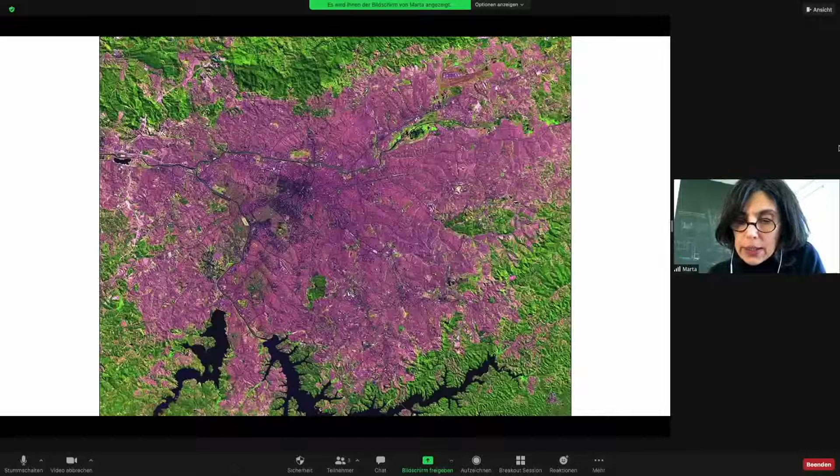São Paulo is a modern city. Although founded almost 500 years ago, the city we face today was basically built in the 20th century. A little more than 100 years later, greater São Paulo has more than 20 million inhabitants. São Paulo, which was a small city in the first 4 centuries of Brazilian history, became the main economical and cultural center of Brazil during the 20th century. As a result of this brutal development and related radical transformation, the city today has almost no buildings from centuries previous to the 20th century.

A second characteristic relevant to this contextualization is that São Paulo lies within a hydrographic basin on a plateau delineated by a network of watercourses flowing through hilly terrain. The metropolis is directly related to the trunk of the waterway system, the catchment basin, which determines a constellation of discontinuous sectors. The railway system, established from the second half of the 19th century in search of available flat and cheap land, chose mostly trajectories parallel to the main rivers, starting the irreversible process of building the wetlands as habitable space.

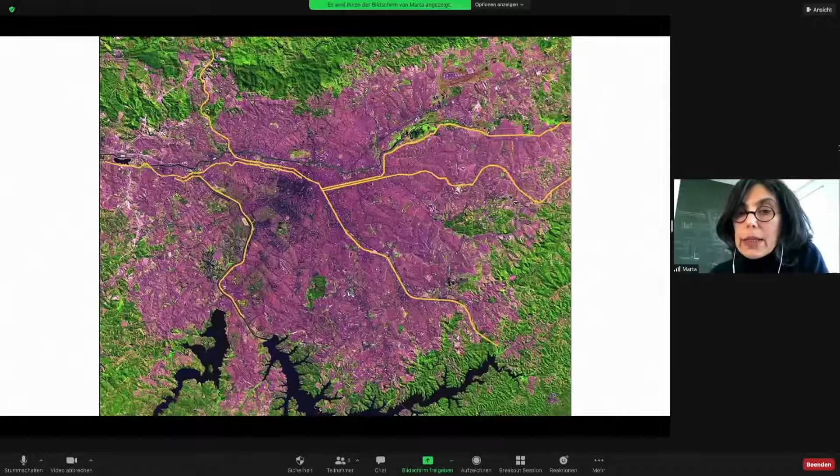And so we finally arrive at the location of the project that I'm going to show. The red ring is the location of Paraisópolis favela, where we developed the Antonico Creek urban project, and the red dot is SESC 24 de Maio, located in the historic center of São Paulo.

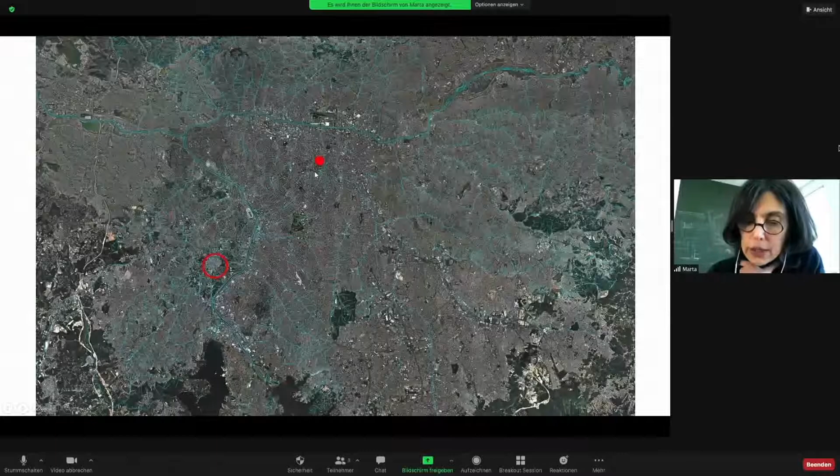The Antonico Creek urban project was part of the favelas urbanization program carried out by the municipality of São Paulo. Paraisópolis is the city's second largest favela, with about 70,000 inhabitants. This is a very well consolidated community that has been living in this place for the last 100 years, including during the pandemic times. In lack of initiatives from the municipality, they organized a very organized system of protection for each other. It's a very consolidated community.

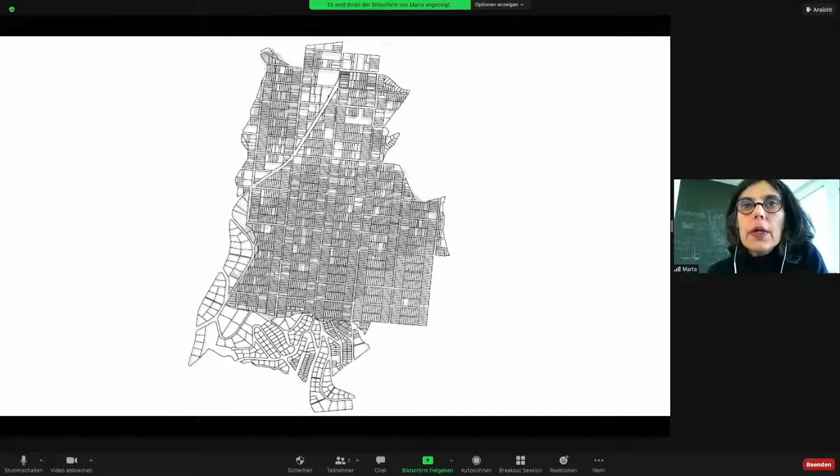This occupation arose as a result of the invasion of a fairly regular subdivision on an irregular topography with some rather steep features, with which the urbanization plan never related. So that was the original subdivision, and that's the occupancy plan on top of it. Cutting diagonally across the orthogonal urban grid, there is a creek that is now largely underground due to constructions that have successively advanced over its natural watercourse — Antonico Creek.

The favelas urbanization program involved a wide-ranging set of urban infrastructure works, social equipment, and new housing. Sanitation and drainage were included in this scope as actions providing needed structuring for better conditions of habitability throughout the favela.

The reurbanization works realized for Antonico Creek would require the removal of irregular dwellings on areas of the creek unsuitable for construction, resulting in the main structure for articulating the public spaces. Consequently, this project could be one of the principal tools for promoting urbanity in the new district that will emerge at the end of the process.

However, the house being an urgent and immediate need, the main question to be faced is the future maintenance of the opened areas, avoiding new irregular occupation.

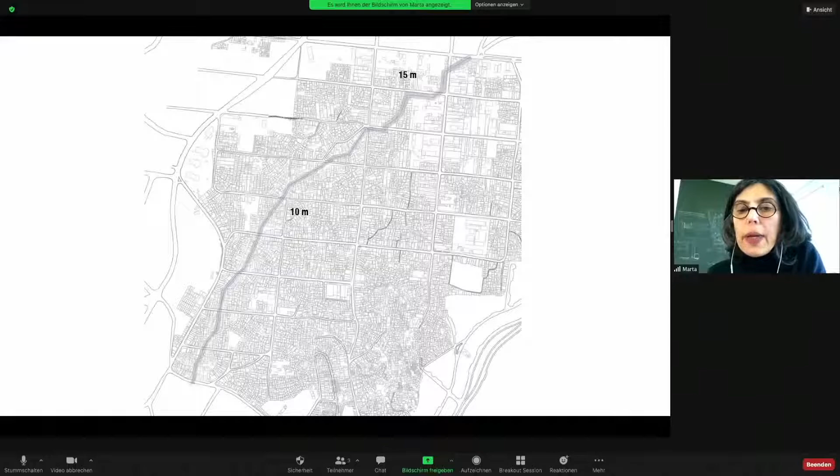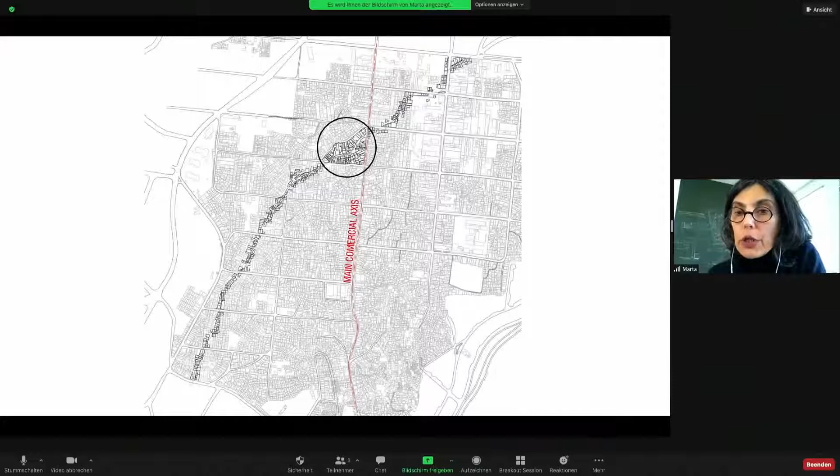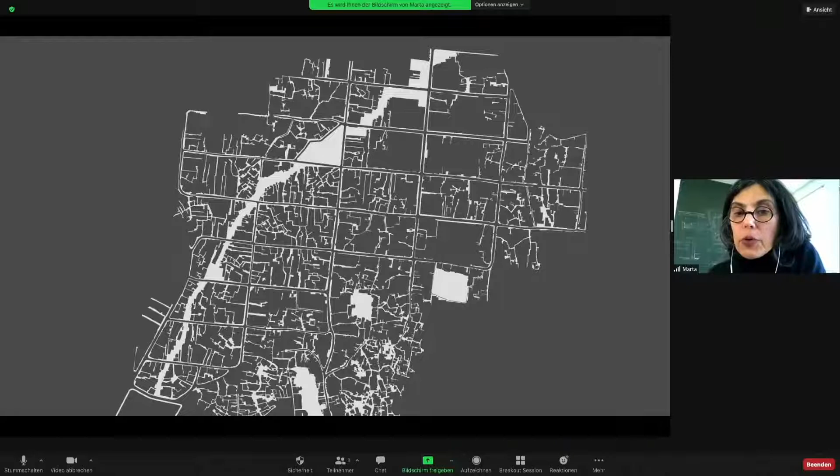First of all, to determine a non-buildable tract, an open area bordering the canal, constituting a stripe with a minimum width of 10 meters. The aim is to ensure access to the channel for the indispensable maintenance service. At the intersection of the main commercial axis, a large area left free may give way to the creation of a square and equipment for collective use. This open stripe will be reprogrammed, giving rise to an ample set of enhanced use values.

Strategy one is creating an unquestionable use value, a good path to mobility. The passage of vehicles other than service vehicles will be restricted. It will be the district's main internal axis of mobility, since it runs along the smoothest topographical terrain to be found in Paraisópolis. Outside the district, it will be extended up to the most recent subway line, connecting the population to the city's mass transit system.

As an alternative means of transportation, a bike path will be constructed, connected to a network of paths foreseen by the city's master plan. The flow of pedestrians and bikers, which should be intense, will be the key factor in the dynamics empowering and protecting the use of the street.

Strategy two: creating a symbolic value, making the river attractive. In the state of São Paulo, the current guidelines for the elaboration of new drainage systems discourage the covering of rivers and creeks. This principle, in the case of a tropical fluvial system, requires the availability of extensive flat marshes for the widening of the watercourse during heavy rainfalls. Such areas are no longer available within densely urbanized areas, where the social costs of removal are very high.

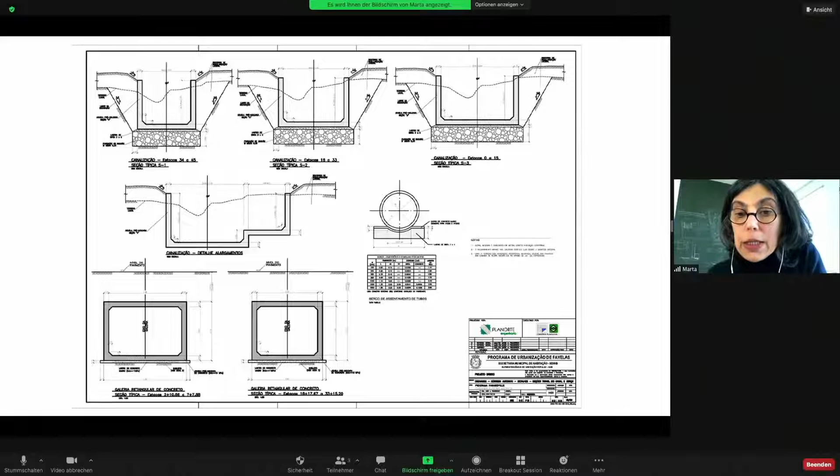When we started this project, this was the original drainage project for Antonico. The solution proposed by the sanitation engineers is based on the deepening of the watercourse channels in order to receive high volumes. This, however, results in a channel that is nearly empty most of the time, with the water at its bottom far below the level of the surrounding area, which is very disastrous because it ends up creating an insurmountable barrier in the city.

The project seeks alternatives for reconciling the favela with the water, no longer considering it as a problem, but rather as something pleasant and positive in the population's day-to-day life. It is based on the premise that it's possible to reconceptualize the model of the drainage system in a way that meets the technical demands of the hydrological system, while also promoting the construction of urbanity in the places it flows through. Our hypothesis points to a possible distinction between the various flows that share the same drainage bed. We can classify these flows into two groups based on the criteria of compatibility with the high-density urban condition which characterizes the areas crossed by the Antonico stream.

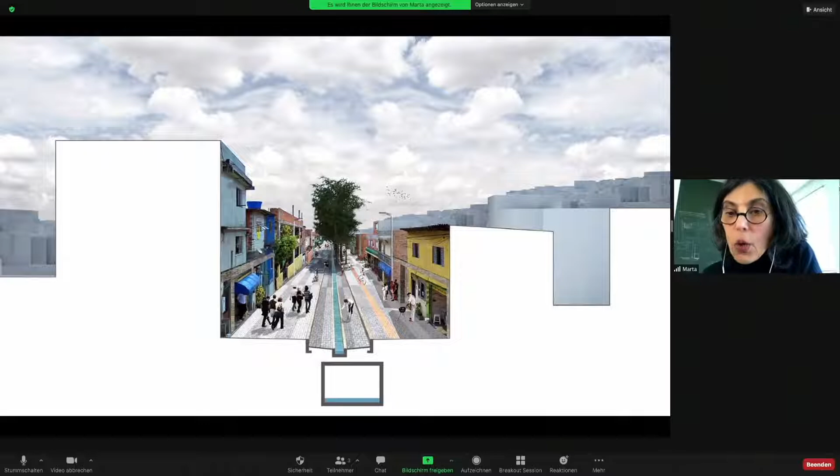We characterize this flow in two types. One is what we call the project flow, understood as a flow where the speed and volume of water are within parameters that allow the proximity of the population with the water, without the risk of drowning or being taken away by the current. That is a flow that will become apparent in the open channels, narrow and shallow, not representing any kind of conflict, and allowing their presence as sutures of the adjacent urban fabric.

The other one is what we call the excess flow, streams whose water volume and speed are not suitable to live with a dense urban situation. It is the flow proposed to stay away from daily life, buried and scaled to meet the limits of the rates of return for 100 years.

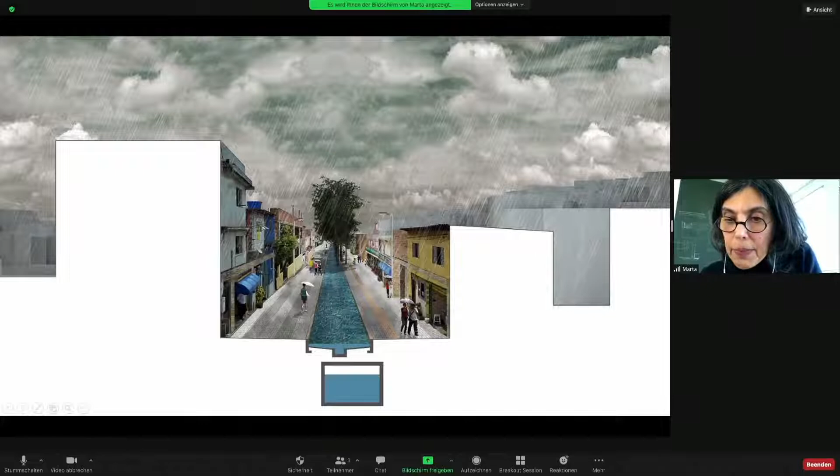The channel project, no longer seen as the production of a mere technical artifact, will create a linear centrality made up of a succession of private and public spaces, open to countless possibilities of resignification by the population.

Strategy 3 is to make the public space readable and active. The stream, in its original condition, represents a big problem to be avoided. The buildings along it turn their back to the water. Being the main passage of people, being an alive and active public space, what was previously undesirable becomes a huge interest.

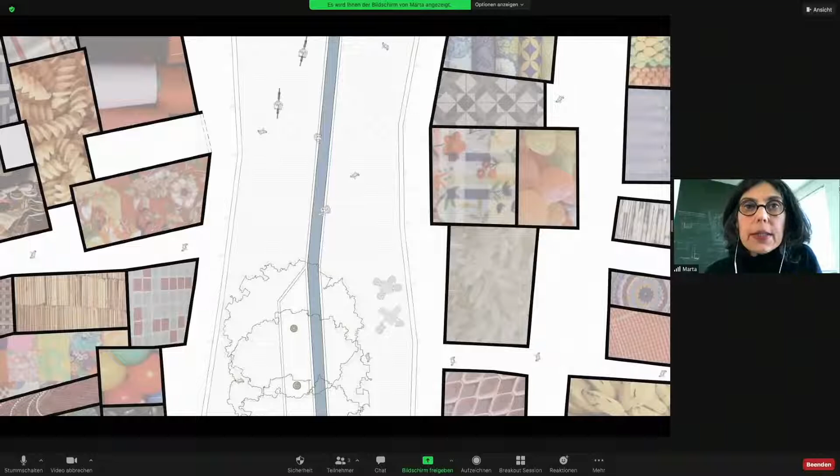Considering that a clear design of the resulting space is fundamental, we imagine the installation of a limit band built of precast concrete elements located in both longitudinal edges of the project area, marking the limit between public areas and private areas, and also serving as support for public installations such as lighting.

Those elements determine an extension band, the area made available for addition in existing buildings within the windowless facades revealed by the demolition and the limit band. It aims to generate a new front for the open public spaces system, ensuring a desirable urban dynamic necessary to manage the place.

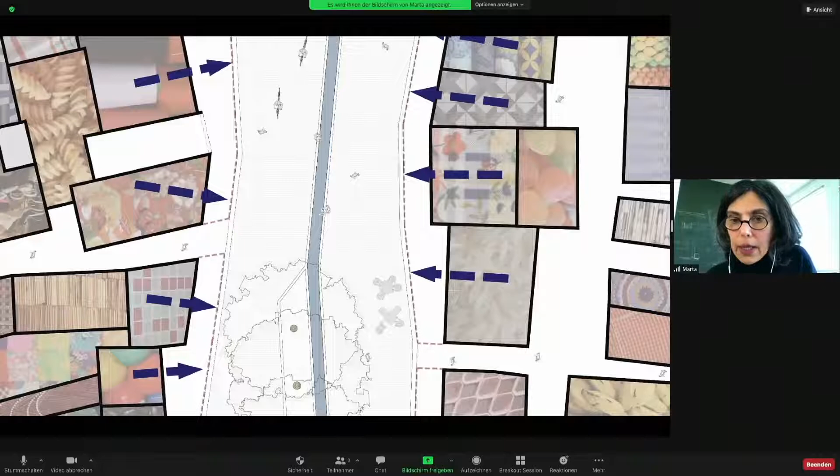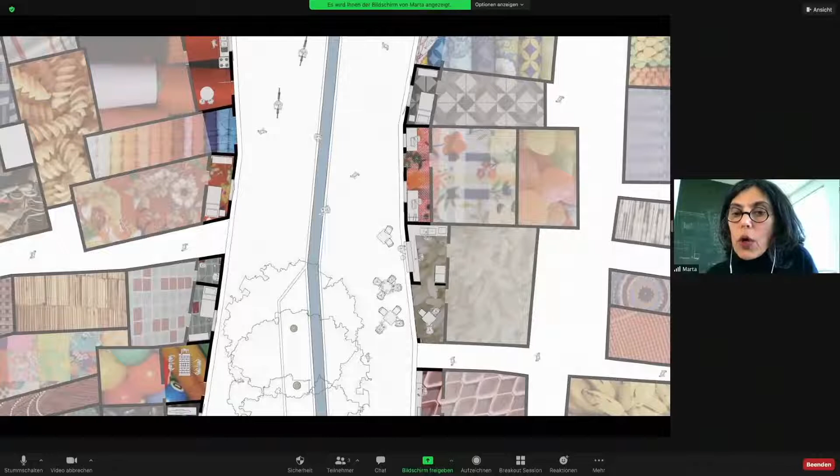Once the houses are enlarged and transformed into commercial and service establishments, a new urban front will arise, boosting the local economy along its course.

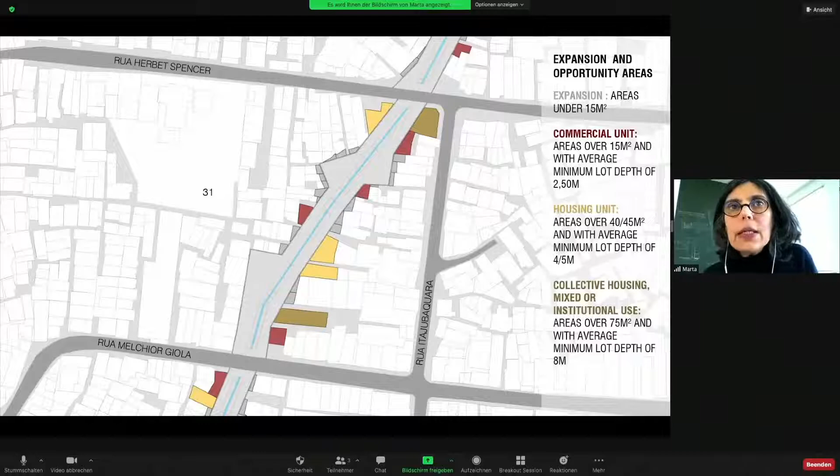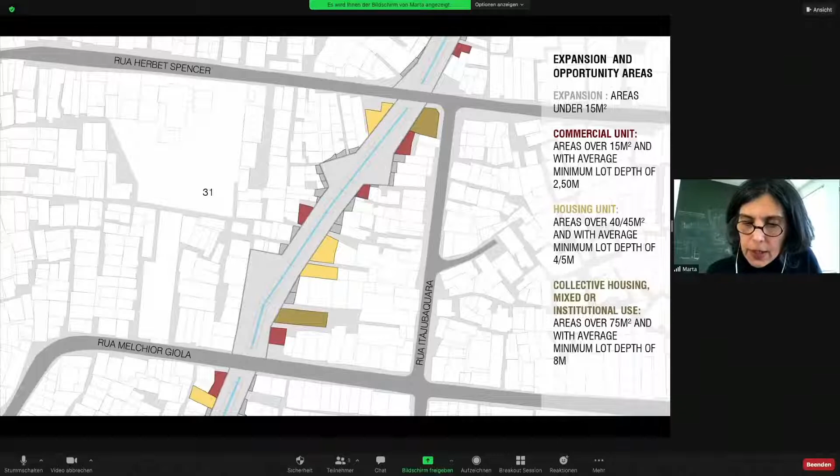So it depends on the size of the resulting place. We can have just an expansion, or a commercial unit, or a housing unit, or even a collective housing mixed or institutional use. So that was the first study I wanted to show you.

And now we are going to speak about SESC 24 de Maio. SESC 24 de Maio is a project by Paulo Mendes da Rocha, with our collaboration. It is located in the historical center of São Paulo, which is immensely dense, diverse, and hosts extremely varied cultural manifestations.

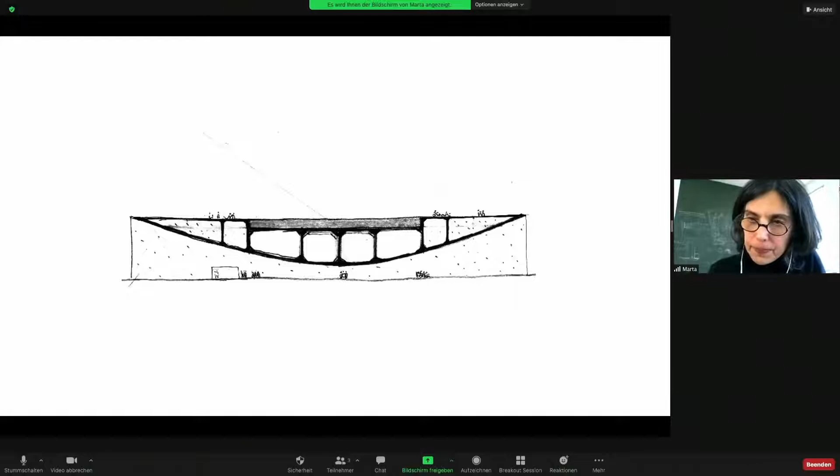To imagine a SESC where the swimming pool is a fundamental part of the program, in the center of São Paulo, meant for us to imagine the biggest possible pool in the sun between the dense mass of constructed buildings. It is amusing to think that the real estate market builds small pools on rooftop apartments marketed as a high luxury few can afford. And this is a popular public swimming pool with a capacity for 400 people simultaneously.

SESC is an institution that oversees 38 activity centers that bring together various fields of expertise, articulated through a variety of cultural, educational, sports, leisure, and health programs. SESC activities are guided by its educational ethics as well as the pursuit of broader social well-being, in which the term culture is understood in its full spectrum. In this sense, full accessibility to the spaces and contents offered by the institution enhances the democratization of cultural values as a form of individual autonomy and the practice of citizenship.

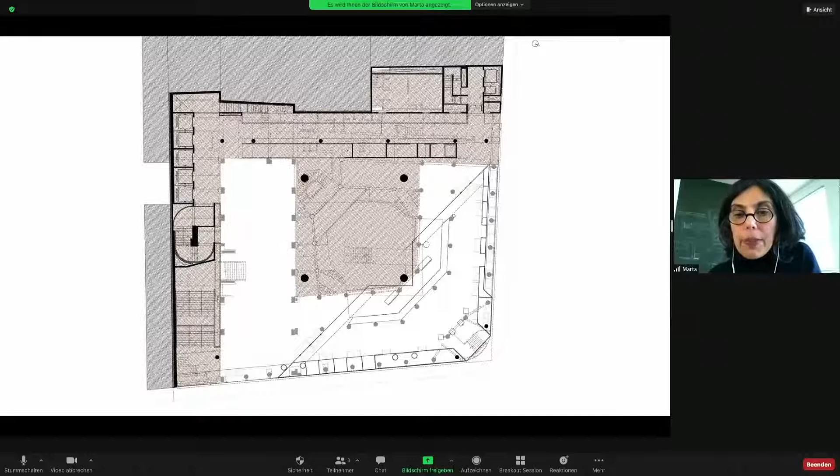In the central void, there are 4 new columns and slabs distributed on some of the floors for a new structure which holds the volume of the swimming pool, built completely independent of the existing structure, as it had to be. A section clearly shows the new structure as a building inside the old one.

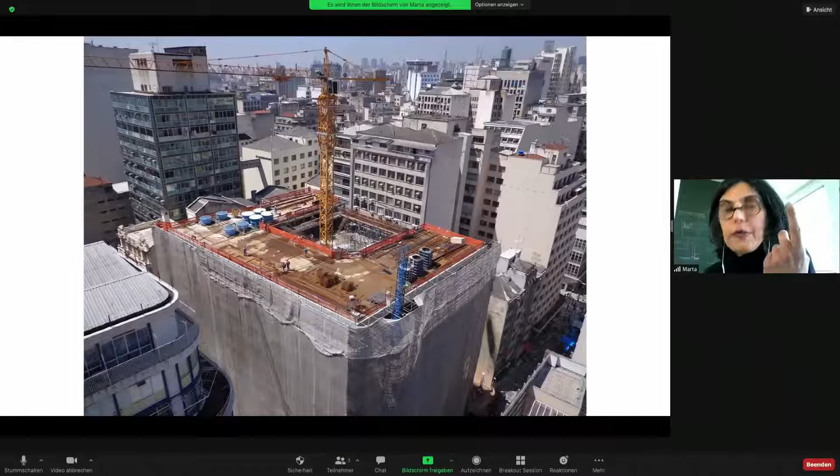The central void was also strategic for the organization of the construction, where a crane was installed once the entire lot was taken over by construction. That is the last floor of the existing building, with the swimming pool above it.

In addition to the concrete pool, a large steel structure along the 3 limits of the new upper volume complemented the solarium, and what corresponded to the depth of the tank accommodates the pool's changing rooms.

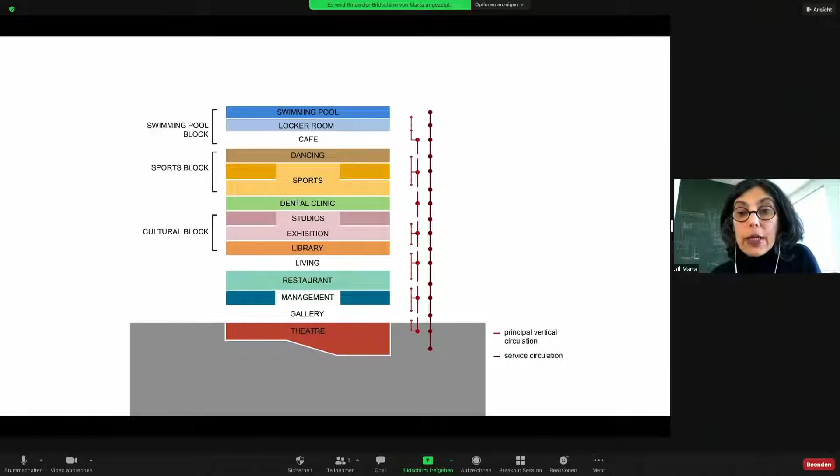The set of activities is organized vertically, with each floor dedicated to a specific program, but related in sets of 2 or 3 floors. In some cases, the central void is kept, creating an association between 2 floors, as for example with exhibitions and art studios, or with sports.

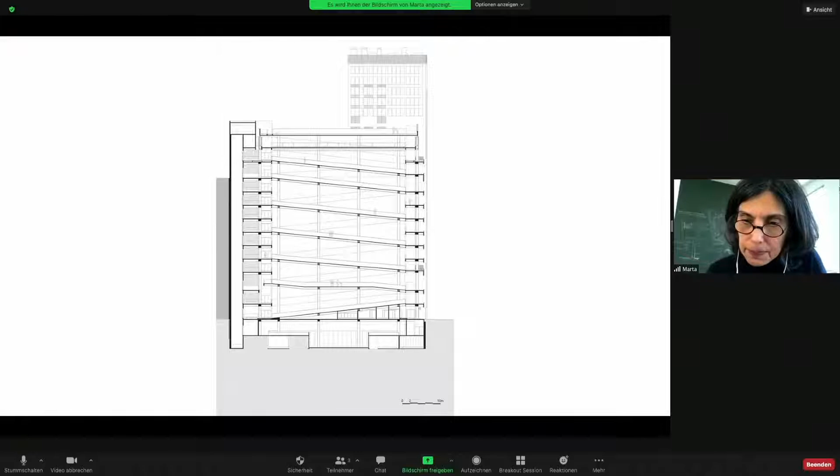In addition to the formal vertical circulation system of elevators and fire escape staircases, there is a ramp system running the entire length of the building as an extension of the sidewalk. It is like a continuation of a walk in the city where one finds different spaces - a cafe, a library, a square, a beach. It is one way of experiencing the building in a fluid, festive manner without constraint. The ramp itself is a place of meetings and games.

The Centro Novo, as this region of the historic center of São Paulo is known, became what it is today between the 30s and 60s, with the construction of a notable set of modern mixed-use buildings, with the ground floor occupied by extensive shopping arcades that cut through the blocks internally.

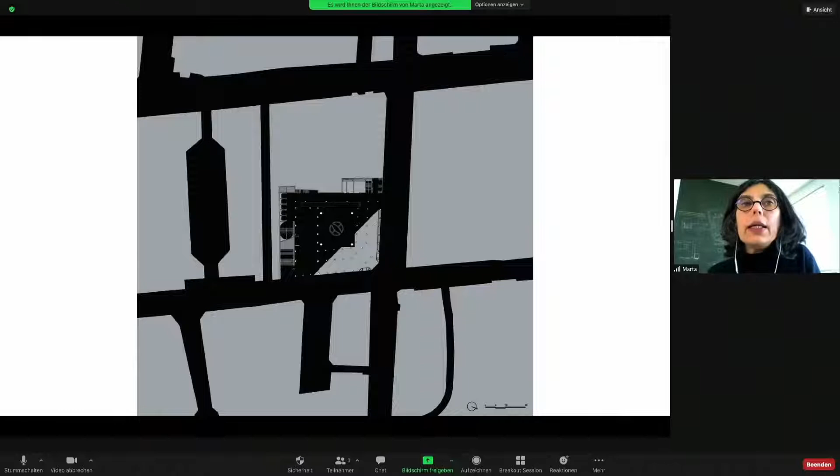The SESC ground floor was built in a similar fashion, as a freely accessed square interconnecting two streets and characterizing the entrance foyer. In the image, black areas represent the set of possible routes through the city.

The corner was the access to Mesbla, the original shop. Although the building is no longer accessed from here, a large window onto the street was created. This is the access of Rua 24 de Maio, and this is the ground floor plan - the double height internal square I described earlier, with the reception volume forming the corner.

I would like to mention that when we made our first visit to the original building with SESC director Danilo Miranda, Paulo Mendes noticed a small neighboring building on a 7-20-meter lot - I'm talking about this one here - especially small for this part of the city, which was for sale.

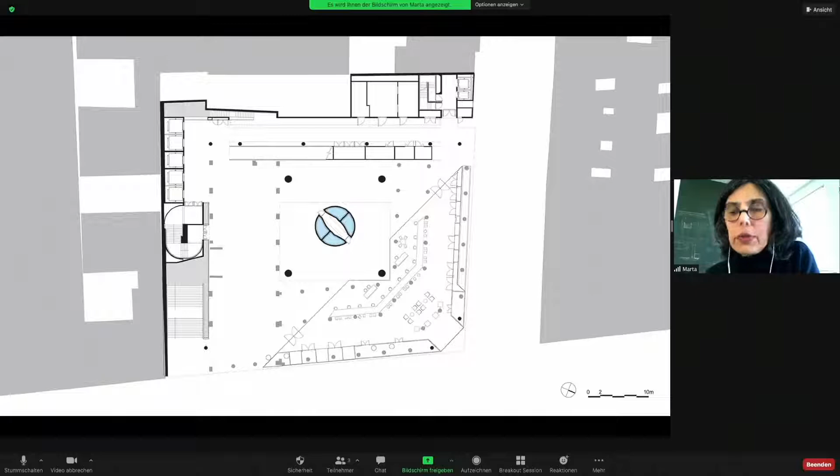He suggested that SESC should buy the building, and made a beautiful comparison, saying the Mesbla building would be the ship and that the small annex should function as a tugboat that approached the ship for maintenance and refueling. SESC purchased the building, and this annex is where all equipment, toilets, change rooms, and storage is installed - a service annex, the tugboat.

The idea of the annex is always beautiful in architecture, the creation of your own neighbor. The annex can always be seen from the ramp and vice versa.

The original building already had a basement used as a car park. We installed the theater here, which is still connected to the city by a 6-meter wide staircase. It is a second theater without a shaped downstage or stage box, which coexists with the set of existing and new columns, respecting the limits and the structural foundation of its neighboring building. It has a nice feature, which is that the access level develops around the entire void of the stage and audience.

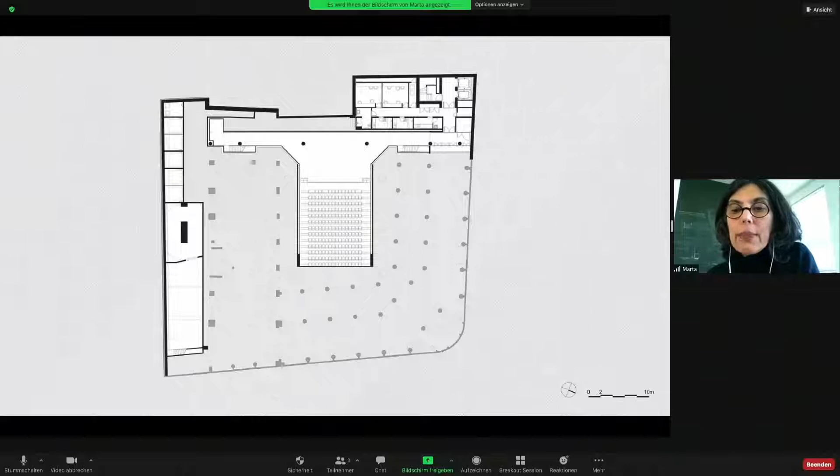On the first floor, offices, administrative offices overlook the street and the internal central void.

The SESC restaurant is well known and popular, and at these times a queue stretches along the ramps. I was told the other day that there was a street vendor selling sweets to the people waiting in line. I found it very funny because it's a completely urban situation. That was exactly what we wanted for that.

Buildings in this part of the city are built in alignment with the lots, creating a pleasing proximity between them. On the other side of the street, we can see the Rock Gallery.

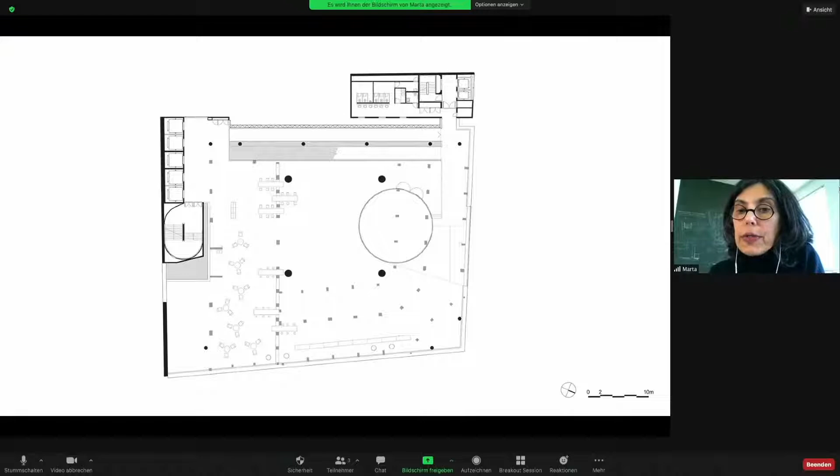The conviviality is part of the SESC program. The low ceiling heights required a series of strategies to accommodate the various installations. The circular construction on this floor houses the exhaust machinery for the kitchen on the floor below. That's one strategy we assumed for the project in order to accommodate all the installation that was necessary.

This floor, the conviviality floor, is open without frames, free of any specific program, and functions as a strategically elevated square.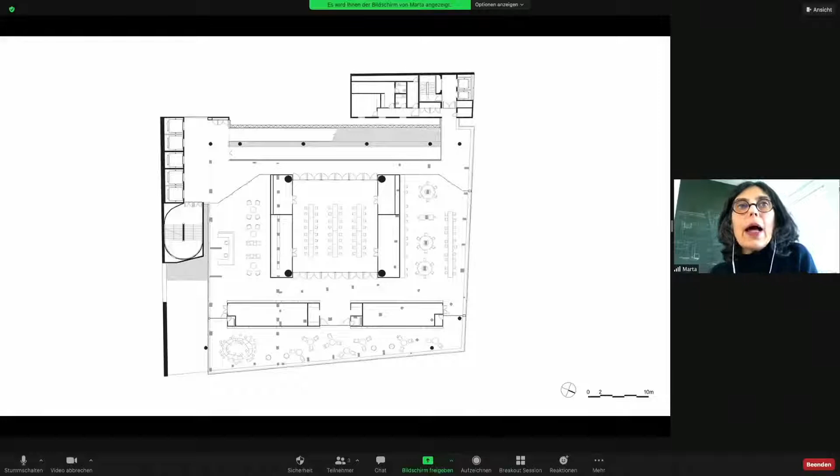The library level complements with the restaurant and conviviality a group of programs.

The frequent columns were often used as support for furniture, as a strategy of transforming an interference into something supporting an effective use.

The exhibition hall, with a double height space in the center.

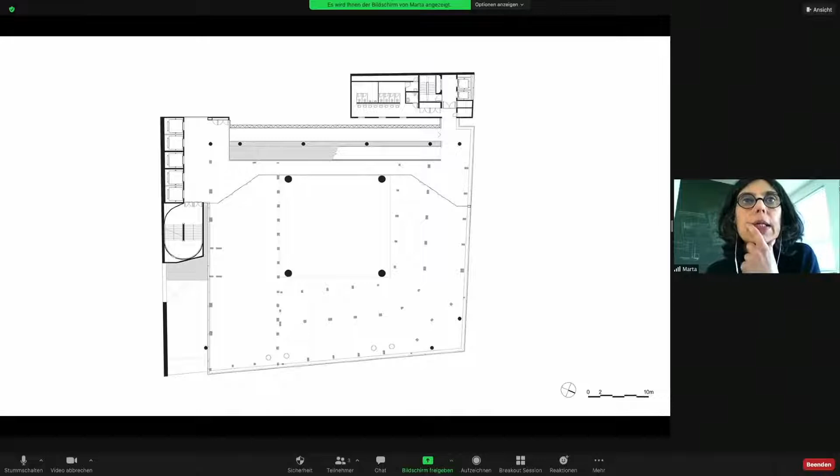The art studios immediately above, and again, to make the exhibition floor below free of any kind of interference, the air conditioning machine house is located on this floor, in those areas.

The dental clinic. It is curious because SESC offers this health service among all the other cultural and sports programs.

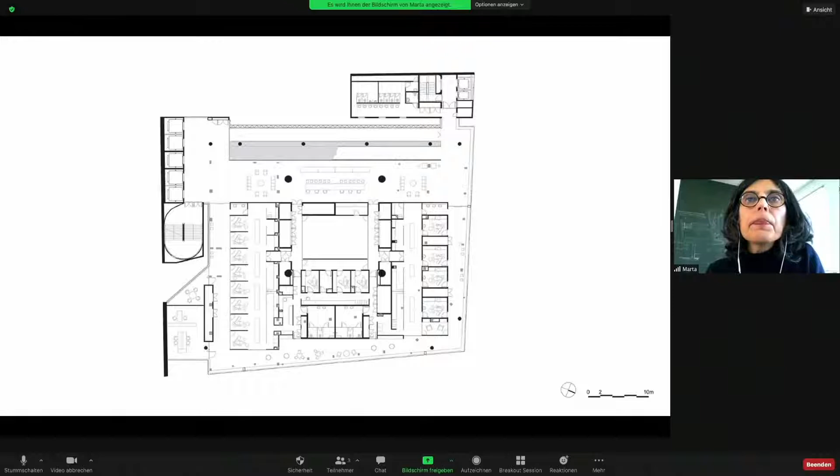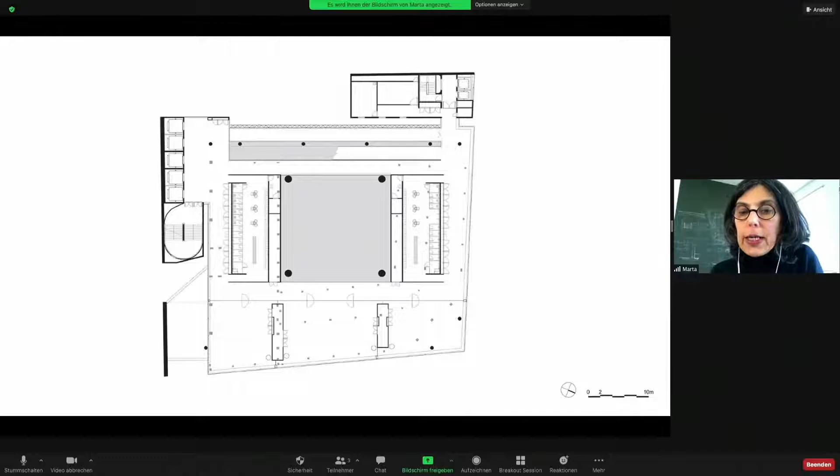The sports floor also has a double height central area. The changing rooms overlook the void that directly connects the two floors.

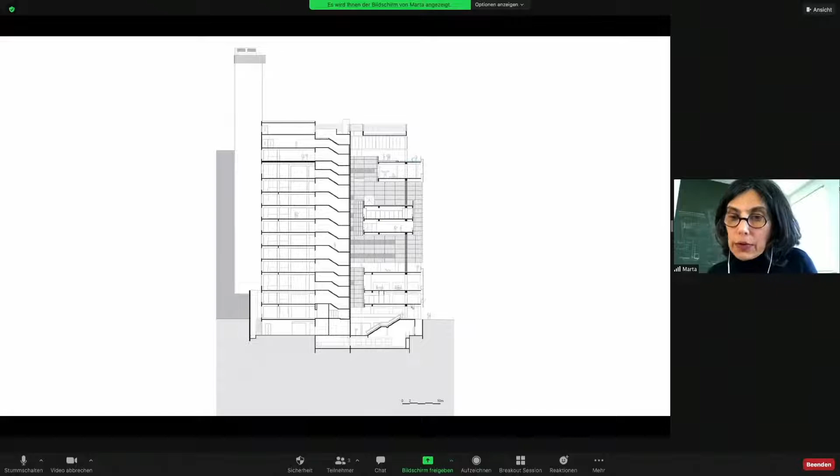This section shows one of the side alignments of the building, which in places abuts the neighbor, creating a situation of balconies distributed through different floors with double or even triple heights. They are like elevated gardens.

This is the conviviality floor, the sport, the swimming pool solarium. It is actually a lateral void that runs along the entire building. The dance floor, the 4 central columns support a set of bars and mirrors.

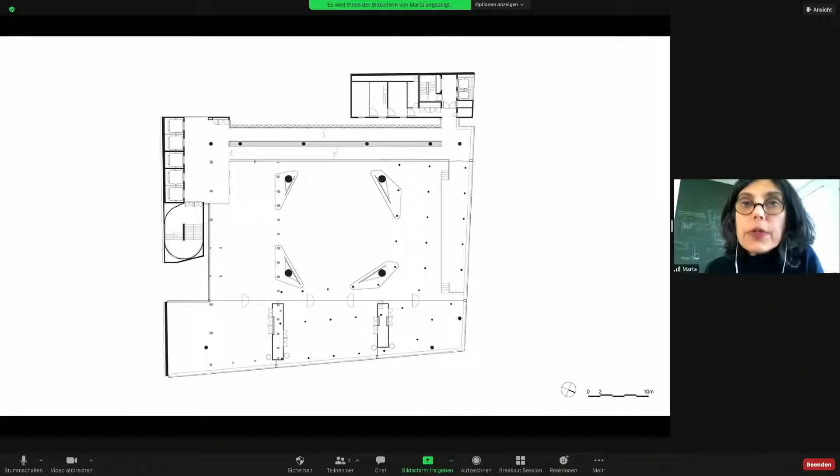This is the last level of the original building, clearly noticeable because all we see now is the new structure. It is the pool garden and complements the swimming pool program.

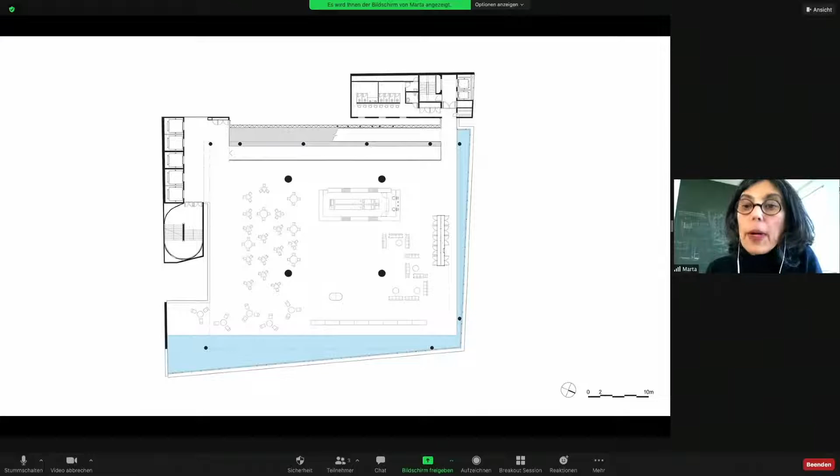Again, it's like a square with a cafe. As the pool is one of the few places with controlled access for safety reasons, the reflecting pool on this level is a free water play area for everybody.

We hadn't imagined this initially, but from the first day, people went into the reflecting pool and freely appropriated the space. Today, it is one of the most successful programs.

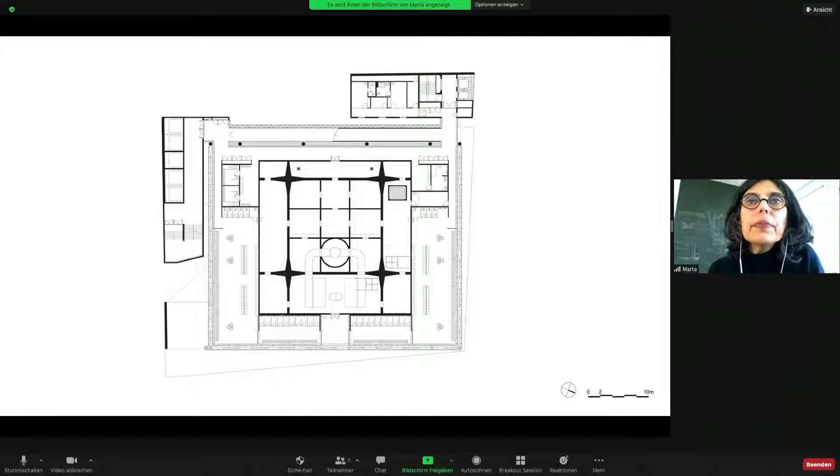The pool changing rooms are accommodated around the pool structure. The last stretch of a ramp leads to the pool. The pool is 25 by 25 meters, the largest possible in this situation.

I took this picture during the construction at a moment of rest, and I like it very much. People look for a comfortable situation in the most unexpected ways.

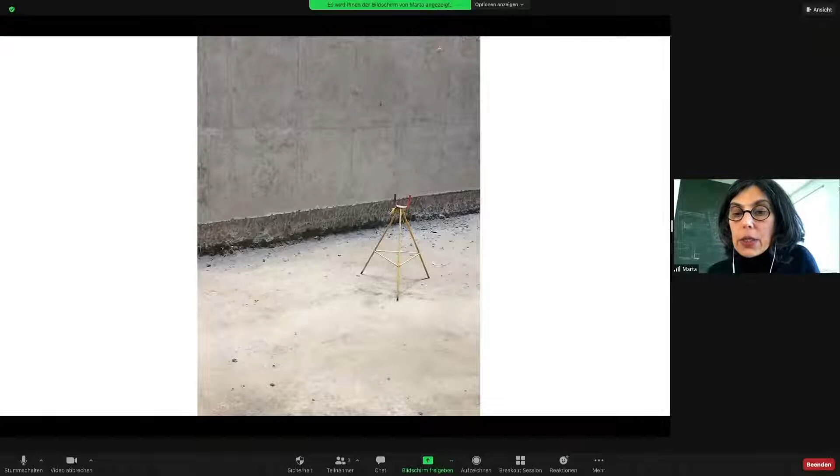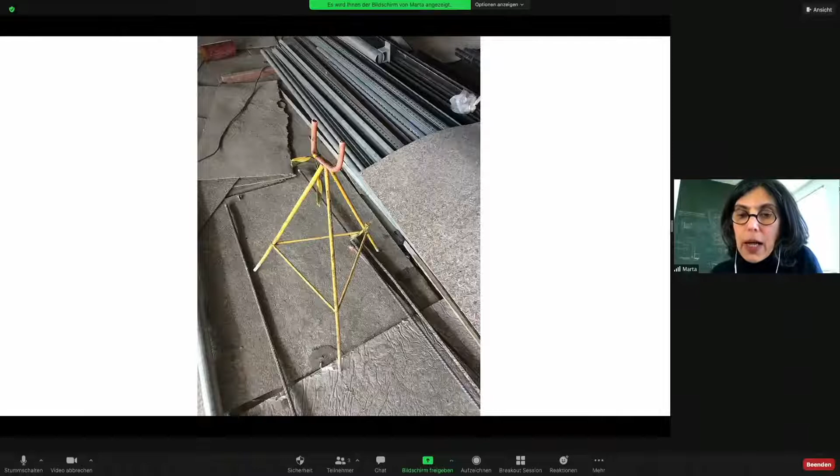We were also invited to design the furniture for the building. The piece you see in the picture is one of those tools made on site to solve needs that arise. It is beautiful to observe the ingenuity and grace of the strictly necessary. The tripod, 3 points that define a plane, is the best way to relate to the often irregular floors of the construction. The piece attached on top is a support for pipes or wiring during installation. This piece served as motivation for thinking about the design of all the furniture.

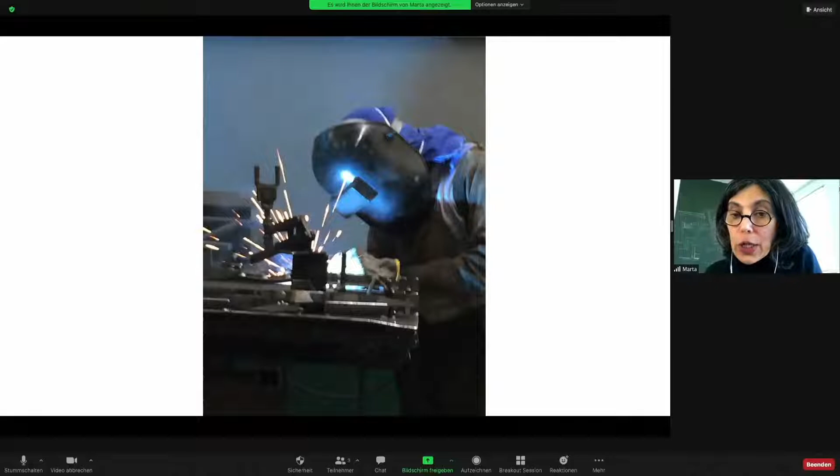SESC 24 de Maio receives on average 10,000 visitors per day, which is a lot of people. The maintenance and durability of the furniture is an important issue. This is why we chose steel as the basic material for execution of the furniture. We also like the idea of using construction labor, the solid bar, the metal sheet, the welds.

The piece found in the construction became table legs, with a different part for attaching the surface. The production of prototypes was essential. Steel has an interesting elasticity, but needs to be well dosed by the geometry of the design. The first table we produced wobbled in such a way it was nicknamed the tremor. The triangular table allows for a number of interesting articulations.

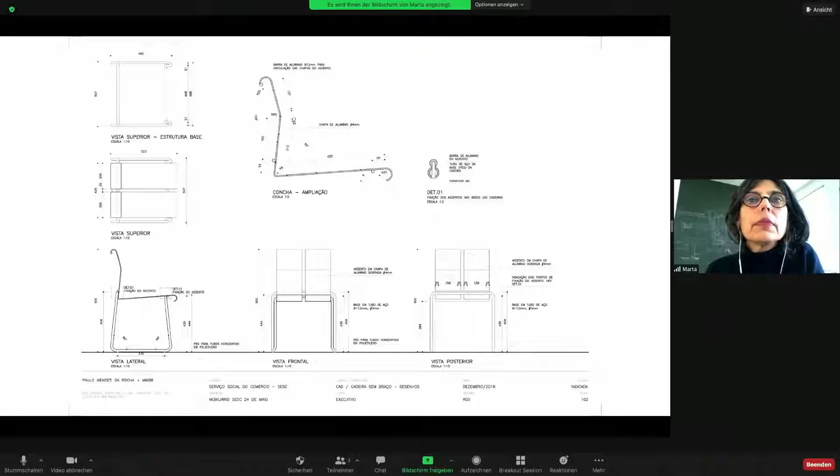The chair, with and without arms, which is stackable. And the sofa, that is a curious piece to design for a collective use context because it's such a domestic piece.

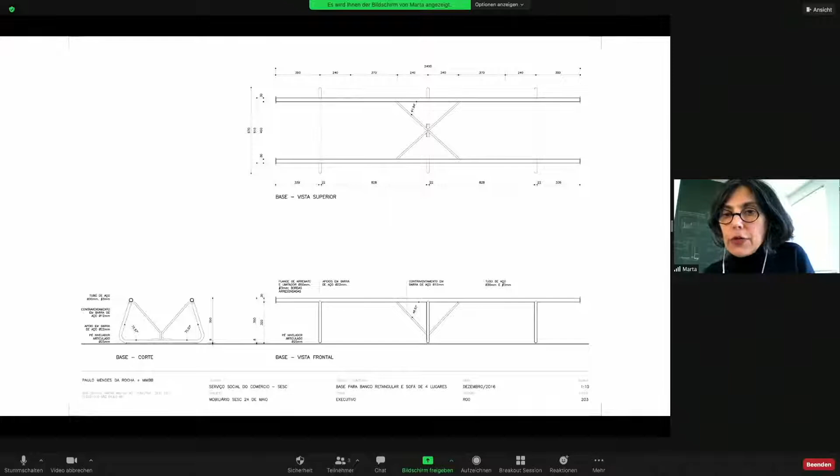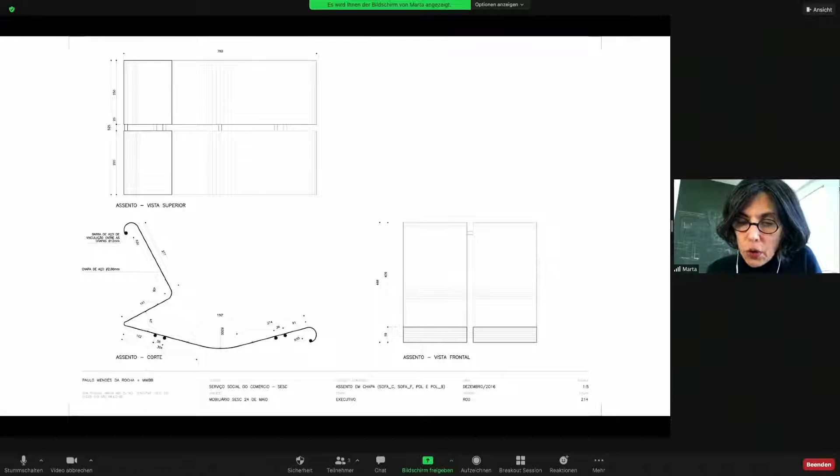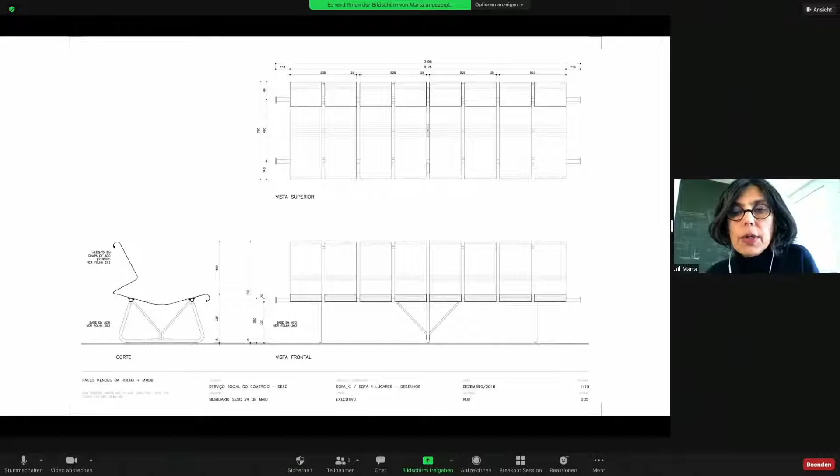The association between seat parts can occur in various ways. They can be the same or different colors. The furniture can be varied by creating new associations. From a maintenance point of view, one seat could be removed to be repainted, for example, without compromising the entire set. There is a nice association when the direction of the pieces is reversed.

The furniture no longer has front and back. People sit face to face. In Brazil, we call this piece a namoradeira or conversadeira. I think namoradeira can be translated as loving maker.

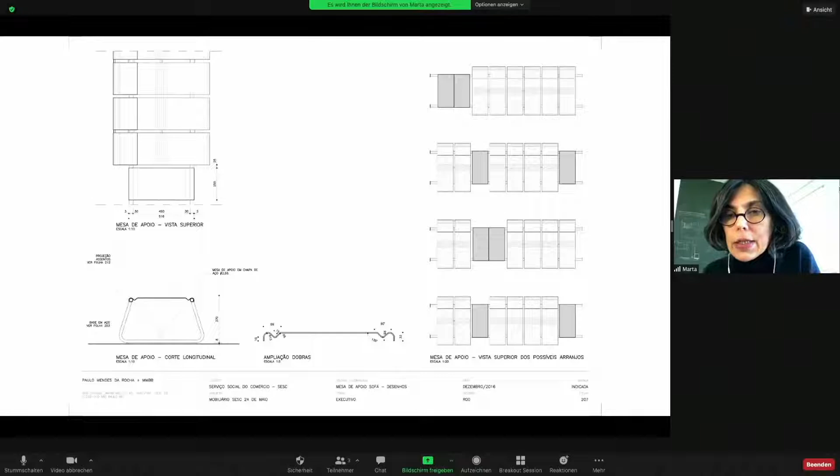A side table is an accessory piece that can take the place of a seat. The armchair is the same seat on an individual stand. Change the stand once again, using a different geometry, and the chair becomes a low chair with greater inclination.